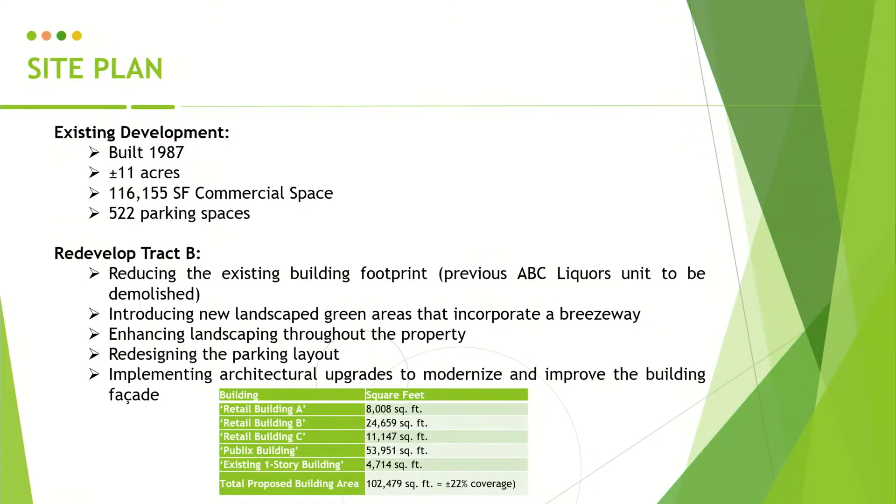Through their site plan upgrades, they're seeking to demolish almost 40,000 square feet of the current Publix storeroom and adjacent retail, and then a little over 10,000 square feet of other inline retail space. They're going to redevelop the Publix mezzanine and adjacent retail, which is going to total almost 54,000 square feet.

They're going to update all the site lighting, parking areas, drainage systems, and utilities. They are seeking to update the landscaping, add green spaces in the building reduction area, and increase the landscape open spaces. They're going to modify one access point, providing for an additional movement between Tract B and the existing bank parcel.

They're going to implement off-site safety improvements on Northwest 41st Street and 97th Avenue, and enhance the pedestrian and parking improvements by installing pedestrian scale lighting bollards to improve visibility and nighttime safety. They're going to make site circulation improvements by reconfiguring the parking stall dimensions to meet contemporary design standards and optimize vehicular maneuverability, increasing dimensions and standardizing to 9 by 19, the current code standard on the retail side, and 10 by 19 on the Publix side.

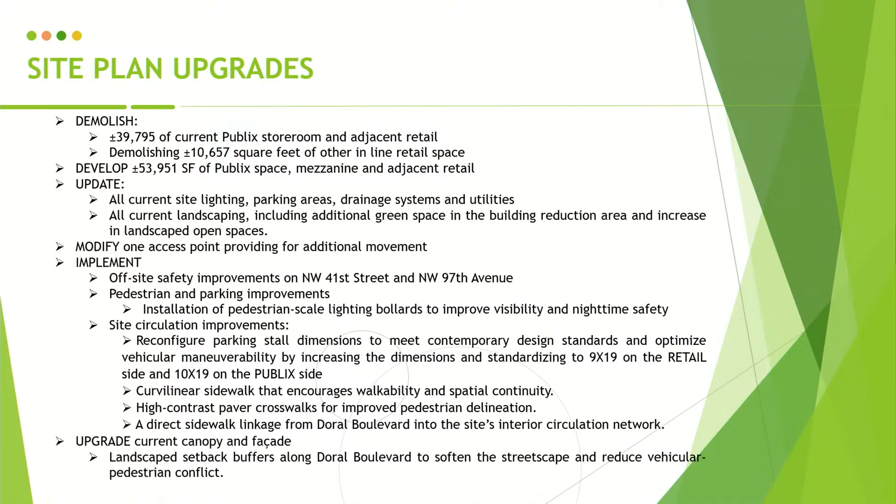They're going to have high contrast paver crosswalks and improved pedestrian delineation, and a direct sidewalk linkage between Doral Boulevard and the site's interior circulation network. Finally, they're going to upgrade the current canopy and facade.

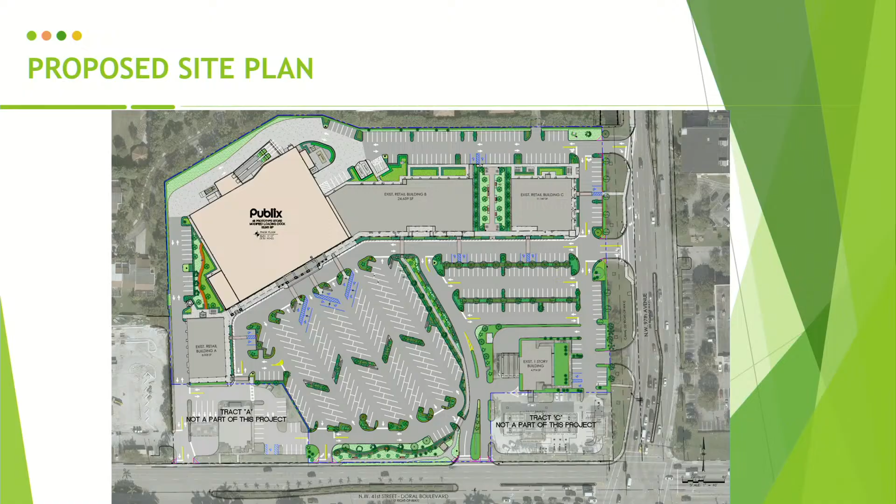Our site plan evaluation standards all comply pursuant to the city code, which we always go through in these presentations. And now we get to the variances.

The first variance is the reduction of parking spaces, where the code requires 521 spaces and the applicant is providing 445 spaces, a reduction of 76 parking spaces, or 14%.

Your code, depending on the use, requires different parking calculations. For restaurants, code requires 197 spaces, 1 space per 45 square feet of patron area. For retail, the site plan is to yield 302 parking spaces, which comes out to 1 space per every 250 gross square feet. And for office, 1 per 300, yielding a requirement of 21 spaces.

We went out and field measured, not every space, just a sample, of the parking spaces in the rear, the parking spaces fronting the retail, and the parking spaces fronting Publix. What we found is all of the parking spaces have different dimensions.

In the rear, we found that the parking spaces are generally 7.5 feet wide by 12 feet 8 inches in length. In front of the retail, we have spaces that are 8 foot 11 inches wide by about 17 feet long, or 7 feet 5 inches wide by 13 feet 8 inches in length, or 9 feet 3 inches wide by 17 feet 10 inches in length, or 8 feet 5 inches wide by 18 feet 3 inches in length. On the Publix side, they're generally about 10 by 20 with some varying dimensions.

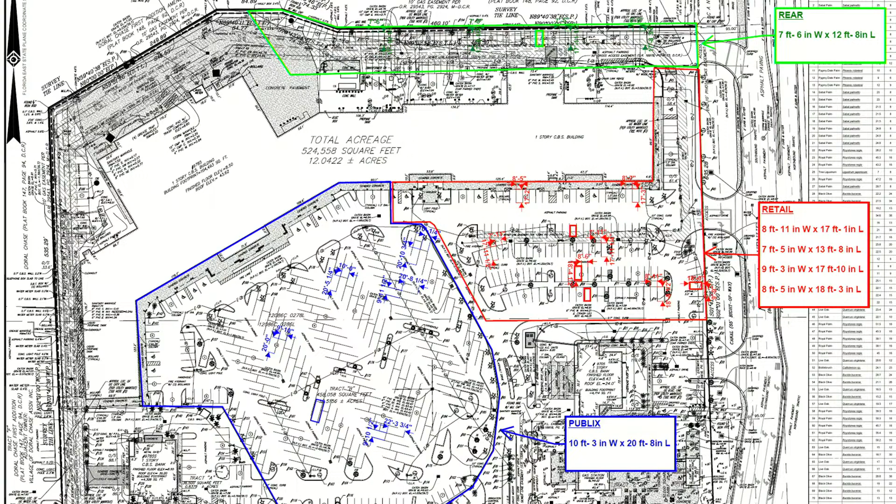So it's kind of all over the place on the retail side, and what they're proposing is to clean it all up. On the retail and the rear, you'll have your 9 by 19, which is your code standard, and in front of Publix, a little bit wider, 10 by 19.

I can't see the screen very well because I need glasses.

Your second variance is the variance to the solar reflective index. The code requires 20%, and the applicant can comply through open cell pavers, managed turf, porous pavement, and other proven materials. The applicant is proffering 8.10%.

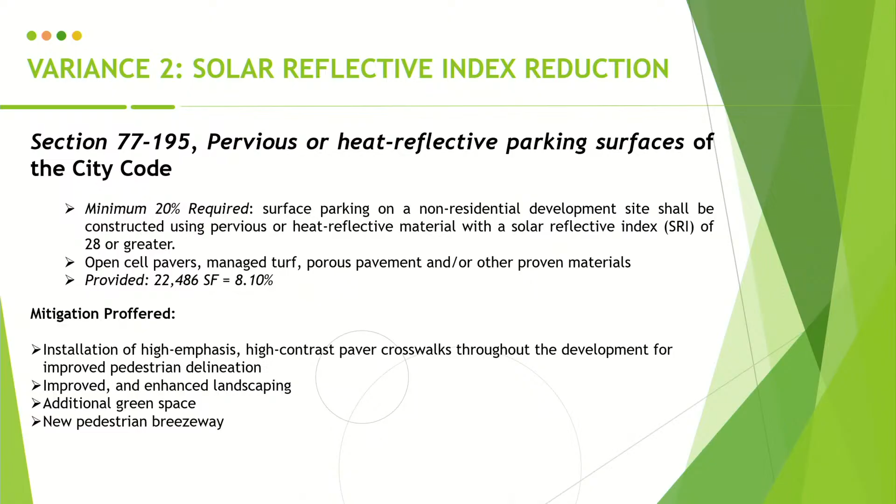To mitigate this, they're looking to install high emphasis, high contrast paver crosswalks throughout the development for improved pedestrian delineation, improved and enhanced landscaping, additional green space, and a new pedestrian breezeway that's going to connect the retail to the parking in the rear.

The last variance is the landscape areas in the parking lot. Your code requires every 10 parking spaces to have a landscape island. Rather than every 10 parking spaces, they're proposing to put the landscape island between every 8 to 15 parking spaces. Your code also requires that in those landscape islands on the ends you have 12-foot islands, where the applicant is proposing a 10-foot-wide landscape island.

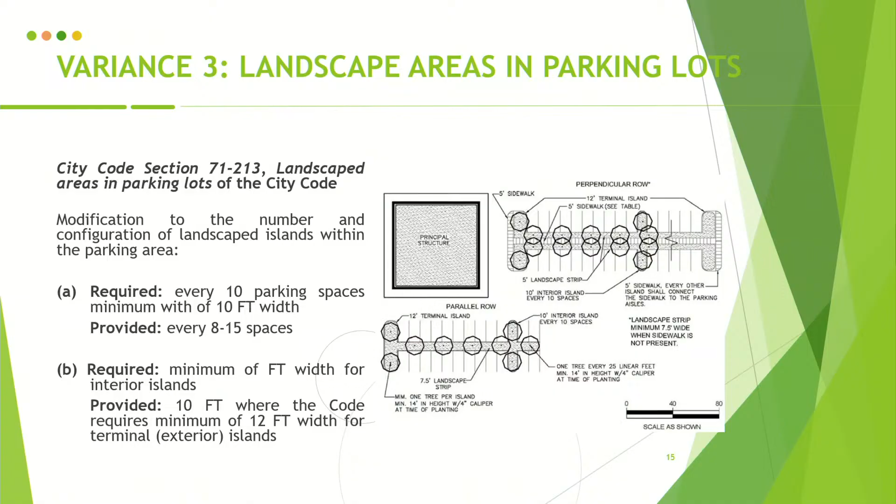So you can see the diagram that's provided for in the code.

With that, staff recommends that the mayor and council consider the proposed variances to City Code Section 77-139, required off-street parking spaces, reducing the number of parking spaces from 521 to 445; a variance to City Code Section 77-195, pervious or heat reflective parking surfaces, reducing the minimum required solar reflective index from 20% to 8.10%; and a variance to City Code Section 71-213, landscape areas and parking lots, modifying the number and configuration of landscape islands within the parking area from the required placement every 10 spaces to every 8 to 15 parking spaces, and the required width of the parking island from a minimum of 12 feet to a minimum of 11 feet.

If those variances are approved, staff recommends approval of the site plan as it is generally consistent with Chapter 68, Article 4, Commercial Districts, Division 3, Corridor Commercial; City Code Section 53-127, Zoning District Development Standards; City Code Section 53-128, Use and Compatibility Table; City Code Section 53-144, Subsection 3, Standards for Site Plan Review; and your business future land use designation pursuant to your comp plan.

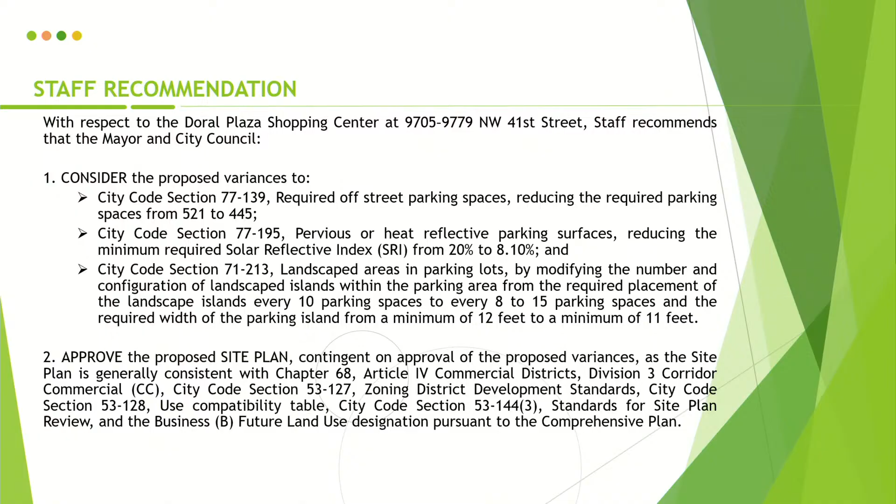Thank you, Michelle. Do we have a presentation from the applicant?

Hi, there's a presentation. Green one goes forward, and the red goes back. I got it, thank you.

Hi, I'm Barney Danzansky. Nice to meet you all and see you all this evening. Excuse me, I'm the developer.

I'm with Equity Development Group, and I've been developing grocery-anchored shopping centers since 1998. This is our company's 28th year. I'm going to give you some warm and fuzzy things to think about this evening, not too technical. I'll leave that to the attorneys and to Michelle, who stole all of my thunder in the presentation, so I've got more cross-outs on my presentation. Thank you. Yes.

Publix operates over 1,400 supermarkets, about 880 in Florida alone, and they work across 8 states in the southeast part of the United States. They're employee-owned and employ over 250,000 people. It's a pretty big payroll.

Part of their corporate philosophy and mission is to be engaged as responsible citizens in the communities that they serve. So we're here today asking for your permission to revitalize the shopping center, and we appreciate the service that you all provide to the community in your roles.

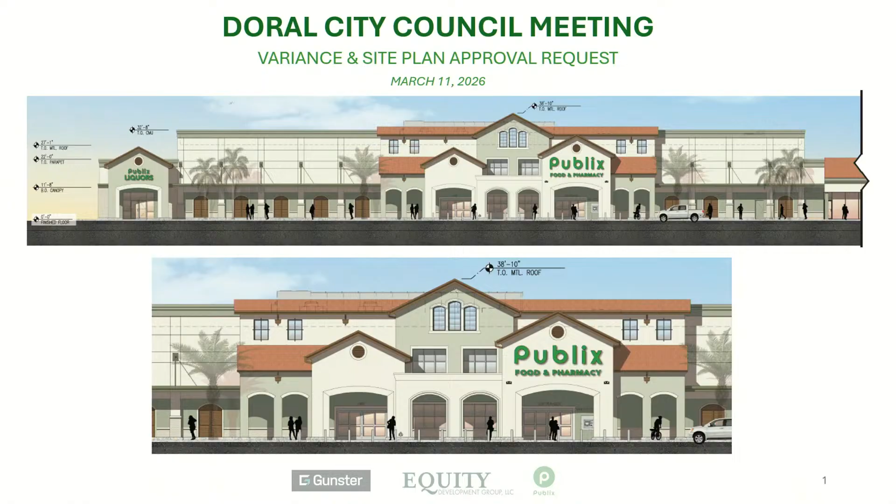So I'm going to push the slide now. Project team is myself as developer with my son Jordan, and if I seem nervous tonight, it's because it's the first time that I'm presenting in front of him, and he started work with me 3 or 4 years ago, so forgive me. I'm looking forward to having him do this next time.

We have Land Use Counsel Mario Garcia and Elenette Ruiz Diaz de la Portilla. Civil landscaping from Grafe Nelson Ortiz. Landscape architecture Grafe is Paulo Ferreira. And we have our traffic engineers Corey Dorman and Victoria Rodriguez. So any questions you may have about the project, we have our full cadre of consultants here for you this evening.

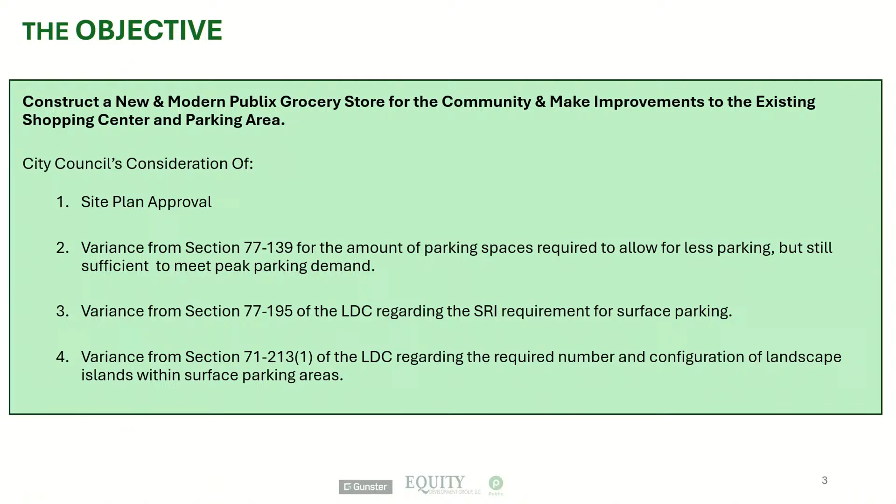Michelle did such a wonderful job of telling us why we're here. I won't go through this slide. We'll just skip that one.

Publix acquired the shopping center in 2019 as part of our larger portfolio, and that's when our redevelopment efforts started. The existing store, as Michelle pointed out, was built in 1987. It's turning 39 years old today. It's store 31, so it's one of their first in the system.

This store existed prior to the city of Doral's existence. And it brings me a lot of pleasure to be here today because my dad, or my camp dad, Morgan Levy, who was one of the founders of Doral, lived down here. So I got a chance to have time with him in his later days as I was working on this project. I know he'd be proud of what Doral has become at this point.

In 2019, we met city staff and started discussing development goals, and from the outset, our goals were to improve safety, improve operations and circulation, improve functionality and accessibility, and improve the overall appearance of the center. And I can tell you that none of those goals have shifted to today.

The hearing today represents a culmination of hundreds, likely thousands of hours of city staff's time, county staff, our consultants. Redeveloping a 39-year-old center while accommodating existing tenants and modern standards proved to be a very complex undertaking. And we want to thank everyone, including Michelle and her staff, for the help along the way.

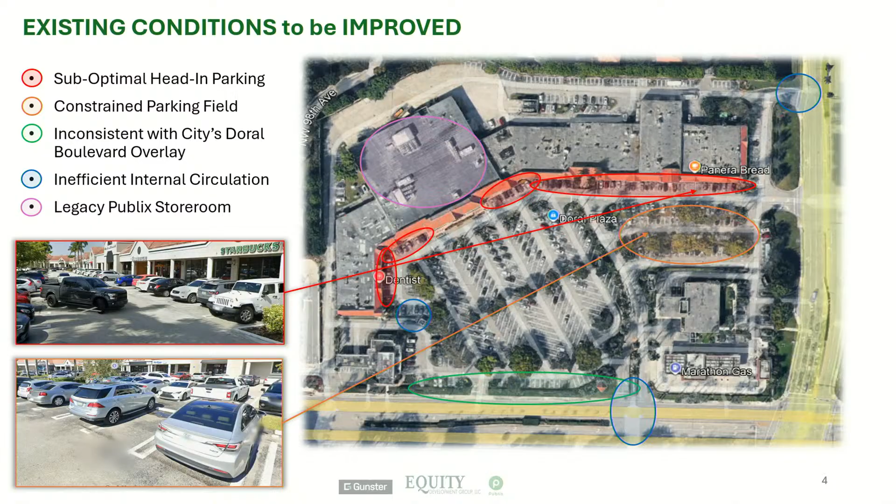We're adding an in and out where it's presently, I believe, just an out up on the northern side of the site. We are reconfiguring the parking fields, as Michelle talked about. We're introducing the Doral Boulevard overlay. We've eliminated a turning motion out of the shopping center for eastbound traffic on 41st at DOT's request. We'll be punching through to the Chase parcel for better circulation and creating some more green space on the site.

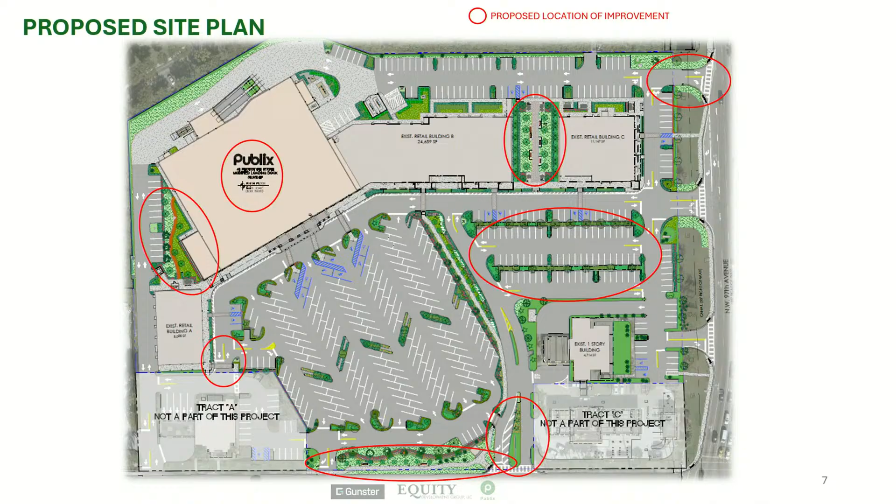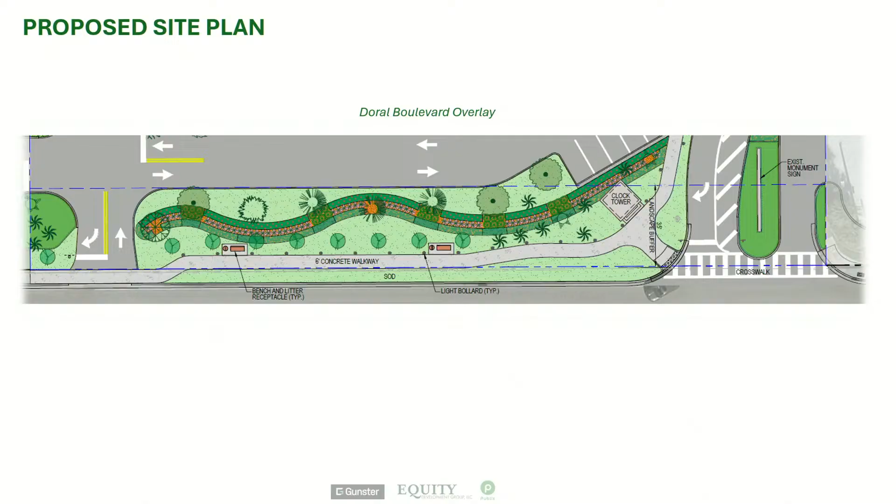Thank you, Barney. Hopefully I can have just as good luck keeping you guys awake. My name is Mario Garcia Serra, with offices at 600 Brickell Avenue, here this evening representing Publix Supermarkets in connection with their proposed redevelopment of store number 31 at Doral Park Plaza.

Before we go into the particulars of each variance request, I think it's important to discuss why you have a variance process in your code. The law requires a variance process because it recognizes there will be instances when a relaxation or variance of requirements is justified by the circumstances and in the public interest. That, respectfully, is the case here.

The zoning code is generally based on requirements for building a whole new project from the ground up. Here, we are working to improve an existing condition. Just as a variance would be justified for an irregular shaped property, a variance is also justified when building within and limited by an already existing shopping center. Each of these variances is being requested in the context of improving an existing store and shopping center.

With regards to each particular variance, on the variance for parking, as Michelle so eloquently described and went out and inspected herself and confirmed, the existing parking field is a mishmash of substandard size spaces, many without proper backup space or drive aisles, and many too close for comfort or for the safety of pedestrians.

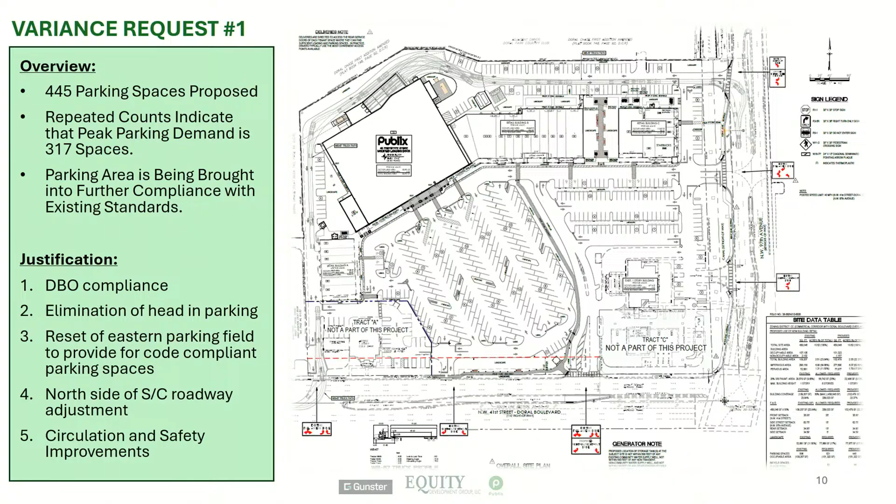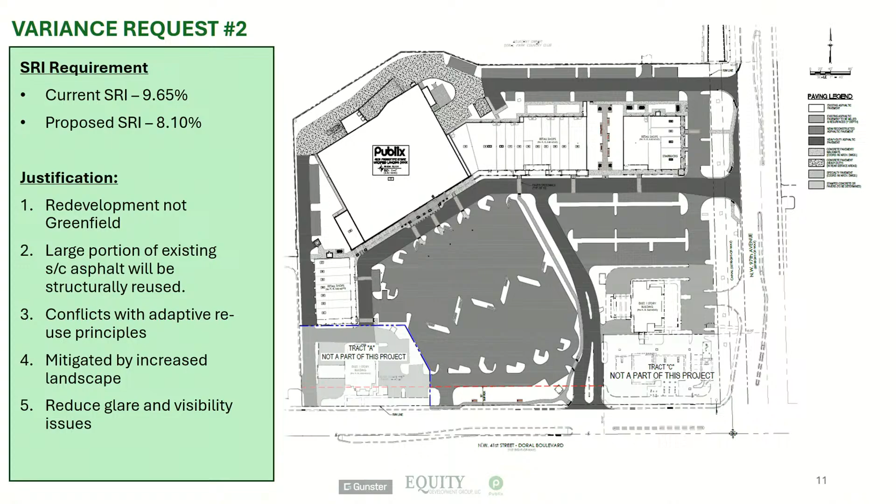Lastly, the number of landscape islands within the parking area will remain the same because, again, we are limited by the constraints of what already exists today. Any additional landscape islands would negatively impact parking count and the ease of use of those parking spaces.

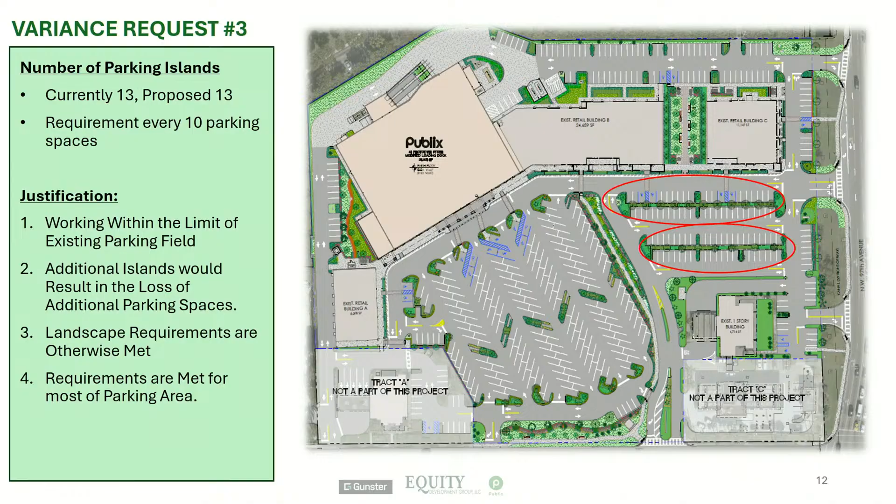Madam Mayor and council members, this Publix is a community institution. It has served the city's residents well for many decades, and these proposed improvements will help ensure shopping here will continue to be a pleasure for many decades to come. Thank you very much to each of you, and many thanks to your staff for working through this with us. It's been a long process, but I think we're bringing now a great new product for your residents.

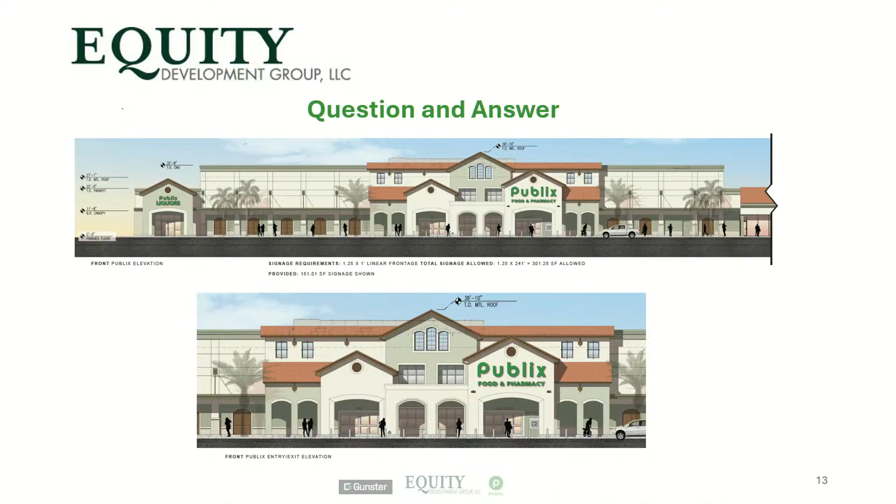I have some comments. Yes, Councilwoman Porras? Thank you to our staff and also to the Publix staff for bringing this forward and for all the considerations. Obviously, I love Publix, and that's actually the Publix where I shop, so I always run into a lot of folks there, and it's a great space, right? I am very supportive of the redevelopment, and I've been looking forward to a bigger Publix in that area.

Obviously, my concern is the parking spaces, right? And I appreciate that you guys are making these larger, considering some of the parking spaces there are a problem. But they should have never been that small in the first place. And I know this was before even the city was incorporated, so it's not really your fault either. But I really can't support reducing 76 parking spaces, maybe something less significant, like 10, I'd be in favor of. Because I know that 10 years from now, we're going to look back at this and wish we had a lot more space. So I just wanted to put that on record. I can't support the variances, but of course I will be supporting the redevelopment and improvement you guys are making in that area. So thank you guys.

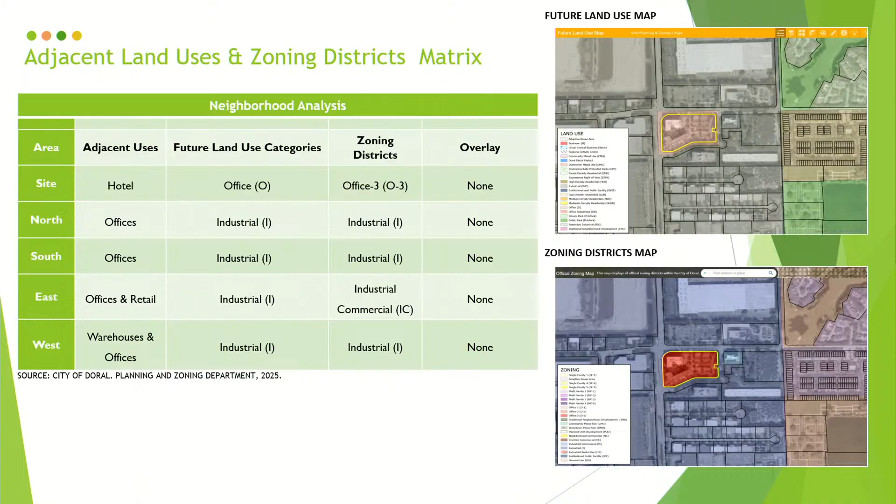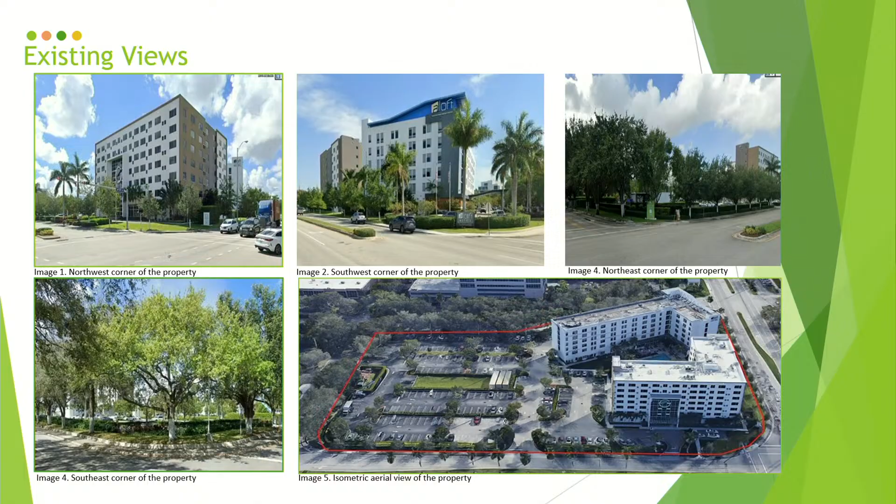The applicant proposes second reading this evening for land use and zoning. The current land use is office, and the current zoning is Office 3. Site areas of the existing developed site and surrounding area are before you on the screen.

So let's talk about the future land use map amendment. Today is second reading. The applicant is going from office to office residential. Office currently permits corporate, commercial, and professional offices, hotels, medical buildings, entertainment, and cultural facilities, up to a floor area ratio of 5%, and shall contain retail and service uses.

Building heights cap at 14 stories. Open space requirement is minimum 15%. Your floor area ratio requirement is 0.5 on the first floor, 0.25 each additional floor, and structured parking is excluded from your FAR application calculations.

The applicant is proposing a land use map amendment to office and residential use, which permits professional offices and clerical offices, hotels, motels, residential uses with a maximum of 16 units per gross acre, FAR of up to 10%, containing retail and service to serve the on-site residents and businesses, a building height max of 8 stories, open space requirement of 15%, and floor area ratios very similar to that of office.

One item to point out: the building heights in the proposed land use amendment are 8 stories, where the current permitted are 14 stories, so there's going to be a decrease in that available height, which I think is important for purposes of this conversation. And the FAR goes up to 10% in the amendment, whereas currently it's at 5%.

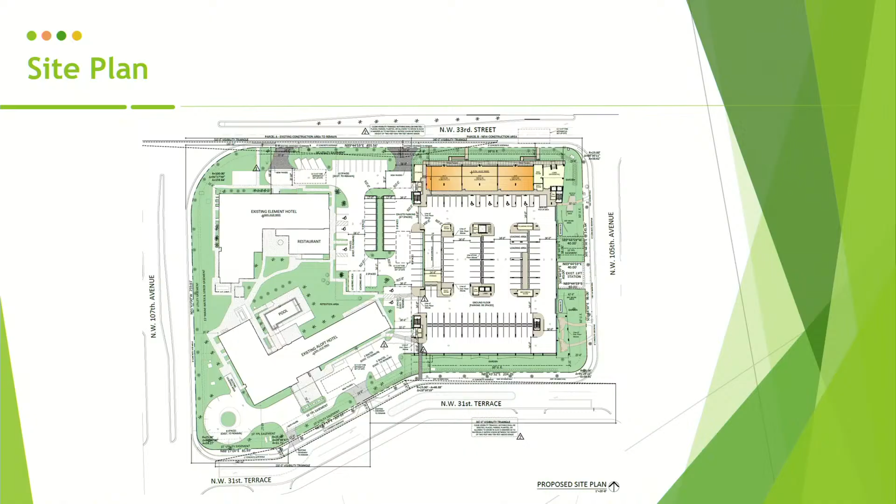They're going to go to 8 stories, with the minimum lot area, max building, open space, setbacks, et cetera. Here's a copy of the site plan. You can see on the east side that configuration is actually the inside of the garage, and for the units, residents will be able to drive up and park at their unit.

I think the applicant has a video that shows that simulation. Here are proposed renderings. Oh, hi, what happened to my presentation? Thank you.

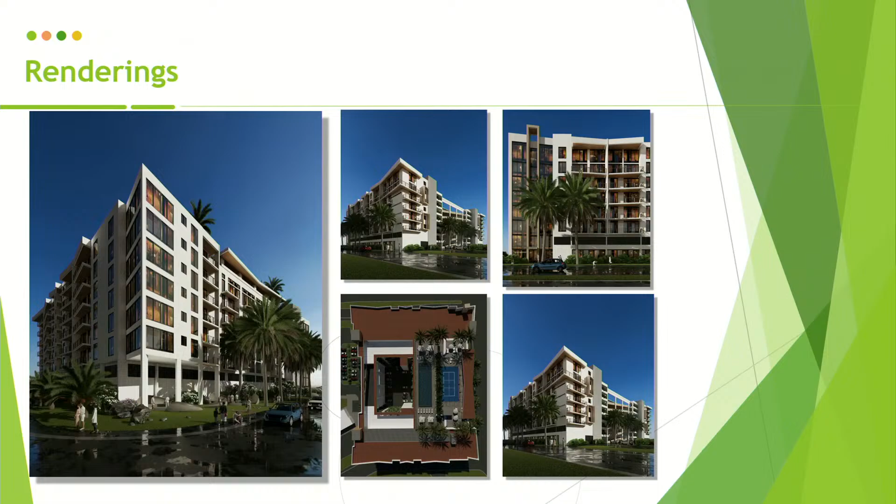Proposed renderings, your elevations, and then with all of my site plans, your plan complies with all applicable standards in the code, consistency with your comprehensive plan, promoting better site design, integration of the project more effectively into the surrounding area, enhancement of property values. It ensures a harmonious relationship among buildings, uses, and visitors. The project seeks to protect the health, safety, and welfare of our residents and visitors. Traffic concerns are addressed, and the last criteria is not applicable.

With that, staff recommends that the mayor and council approve the following request for an approximately 4.95 acre property generally located at 3285 Northwest 107th Avenue: a land use amendment from office to office and residential, a rezoning request from office 3 to multifamily 4, and site plan approval to develop the eastern portion of the property with an 8-story mixed-use project comprising 69 residential units, 5,000 square feet of office space, and structured parking for the 2 existing hotels on the western portion, as well as the 69 residential dwelling units. Thank you.

Okay, thank you very much, Michelle. We'll hear from the applicant if there's any additional comments.

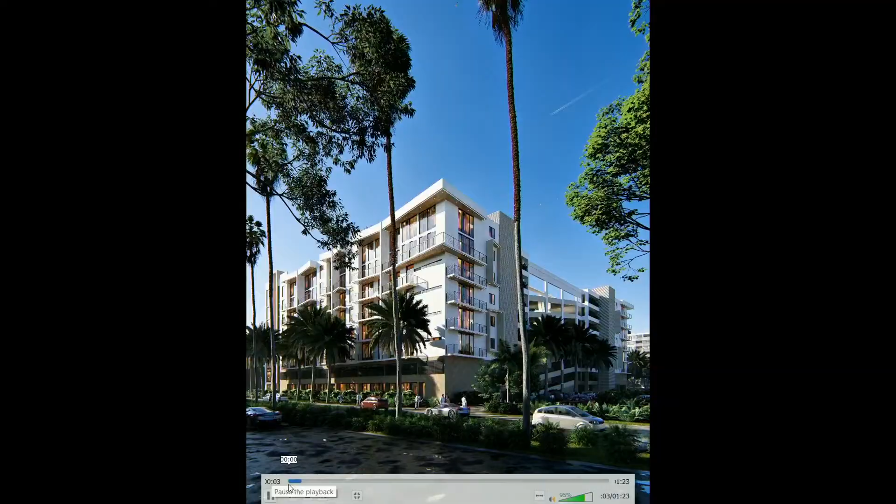Okay, this will show you the concept, which is a totally unique concept, and basically everything else follows from it. I'd like for you to take a look at what the main concept is on this project, which I think is a unique one.

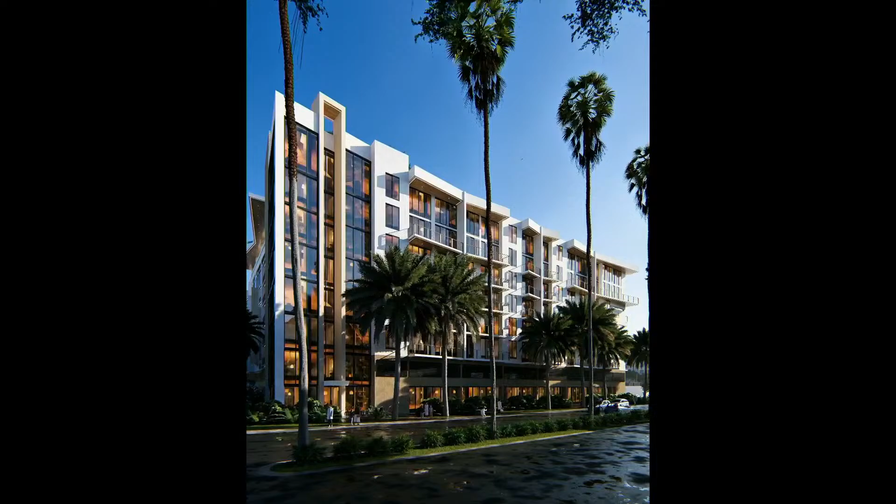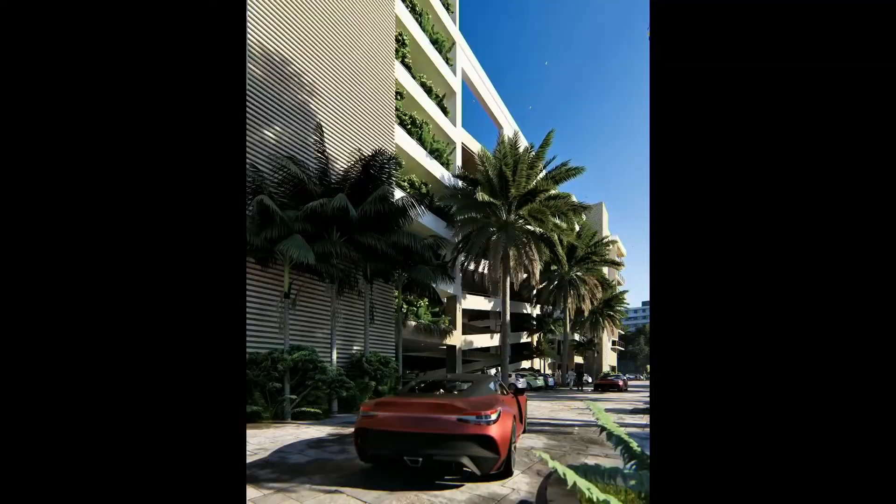The car is not included in the sale price.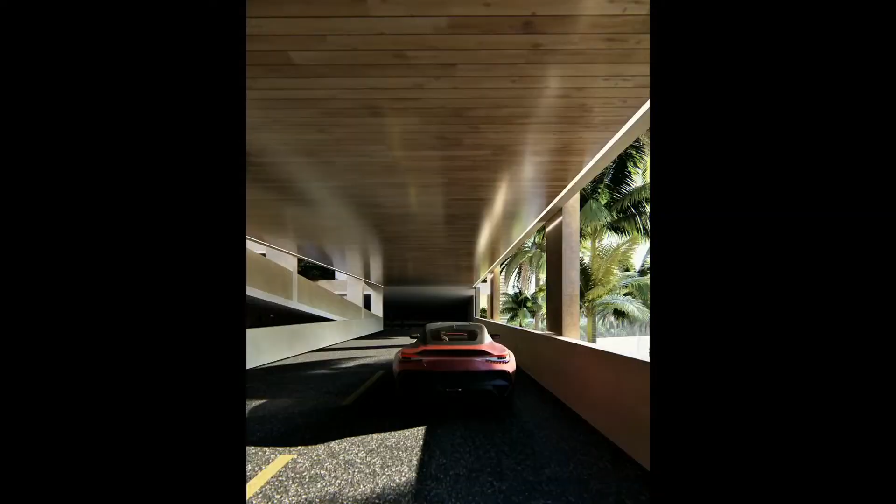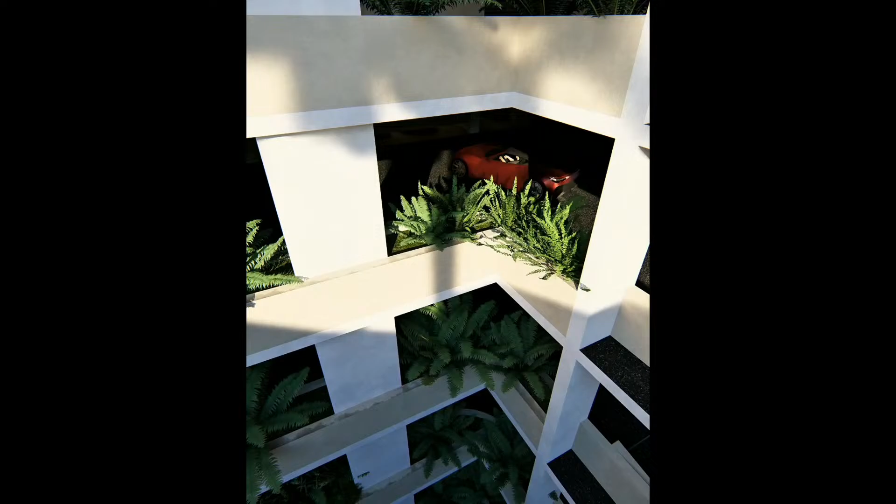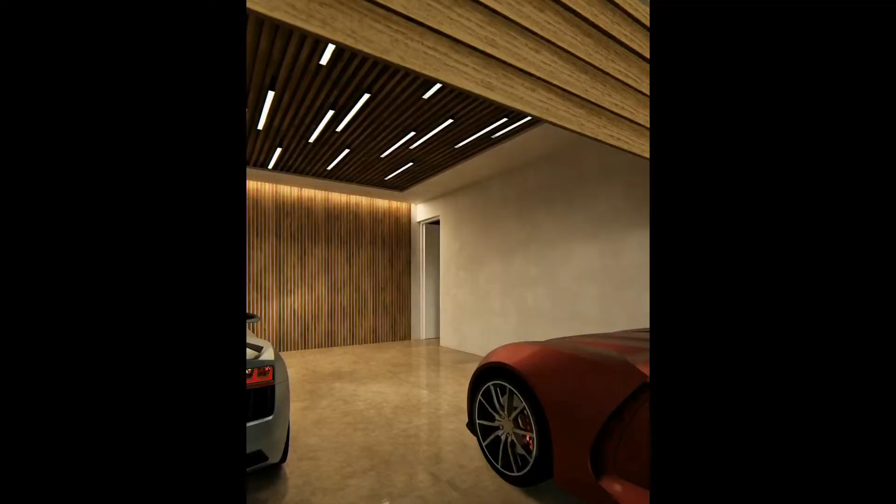Okay, we're approaching now what I really want you to take a look at here. It's nice. You will actually be able to drive into your own garage. These are basically single-family houses placed vertically. So imagine taking your grocery shopping straight from your garage to your kitchen. To my knowledge, this is not available anywhere in the U.S.

Very nice. Okay, so now that you've seen the concept, which is what I wanted to show, with the presentation that Bill Riley and Michelle Lopez have done, I really don't have to add much to it, except to reiterate two things.

Number one, we are proposing 69 units where 109 units are allowed. Number two, it's very important to reiterate that the traffic study... Carlos, could you pass these over? I'd like to pass around a couple of sheets having to do with the traffic study. We conducted a traffic study which concluded that the project will generate only 28 and 40 net vehicle trips during the AM and PM peak hours respectively.